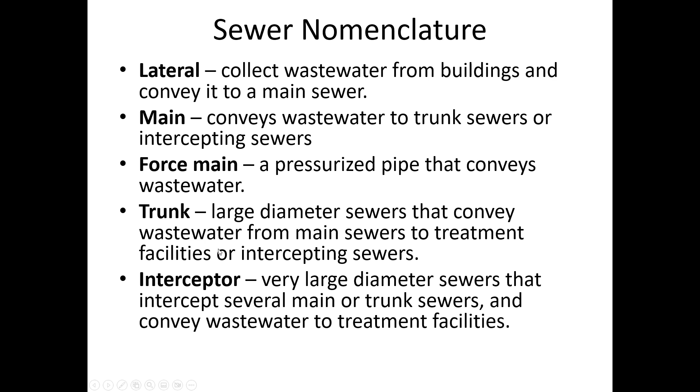A trunk is any pipe that has accepted several different mains together and is conveying it towards the treatment facility. There isn't much to distinguish a trunk line from an interceptor, other than in larger cities where you have lots of trunk lines coming together, then they usually designate an interceptor as something that's accepted 2 or more trunk lines. So it's a nested hierarchy: when 2 mains come together, the next one is called a trunk. When 2 trunks come together, the next one is called an interceptor.

Here's an illustration that shows the lateral is the pipe that conveys wastewater from a home to a main. And of course, if there are basements in an area, then the main needs to be buried lower than the lowest occupied floor in a building.

That's one consideration in design, how deep does the sewer have to be, is whether people typically have basements. Around here, I don't know, there are some basements in developments in Huntington, but most of the houses I've been in don't have much developed beneath the ground surface. I think that varies from place to place depending on the water table depth.

The connection to the main is usually not, from the side view, you maybe would be forgiven for thinking that it comes in at a 90-degree angle, but it's usually angled in a direction so that the laterals entering make the flow go in the same direction as the sewage flow, and having that helps to eliminate clogs and makes it easier for maintenance, because oftentimes mains are cleaned on a periodic basis where they've got trucks that will flush the sewer out to try and remove any kind of debris that's settled at the bottom of the pipe, or if they're doing inspections. Just for a variety of reasons, it's advantageous to have the lateral entering the main at an angle.

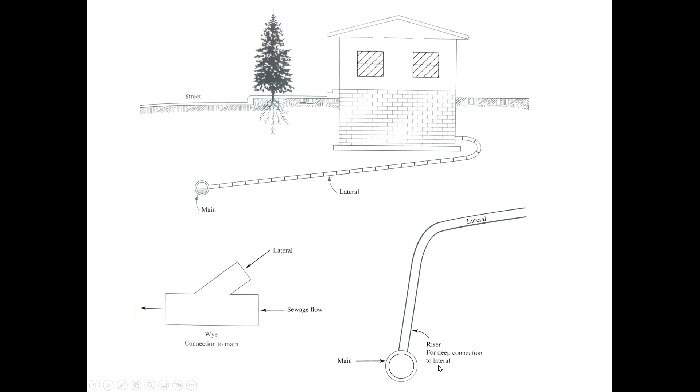For one thing, the slope of the pipe, where you have relatively shallow slopes there's more of a risk of sludge and solids settling to the bottom of the pipe, so maybe you need a more frequent spacing of manholes. But in locations with less flow variability and steeper slopes, then you maybe could get away with having the spacing increased a little bit between manholes. The purpose of the manhole is just to provide a location that the sewer can be inspected and accessed for cleaning.

So we call it a reach, the distance between 2 manholes. Here you can see the interceptor is designated as the largest downstream pipe that's accepting several different trunks together. This diagram is showing that there is a force main, and we don't know from the top view what would be the reason for the force main. It could be that it's draining sewage from a low-lying part of town, but this overview just kind of illustrates the fact that it would be common practice not to have the pipe diameters decreasing in the network.

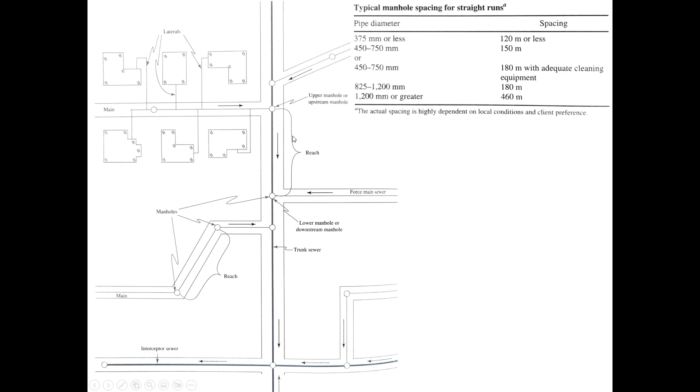We talked about in class on Wednesday that in the early 80s it became more common to have rubber gaskets where pipes come together, to reduce the effect of inflow and infiltration, but also to prevent the leakage of sewage into the groundwater. So there's a dual advantage there.

If there isn't fill under the haunch, that creates a lot of stress for the pipe and more risk of cracking. But if they do support the haunches, that increases the strength and limits infiltration and inflow concerns over the years, because little cracks turn into big cracks over time.

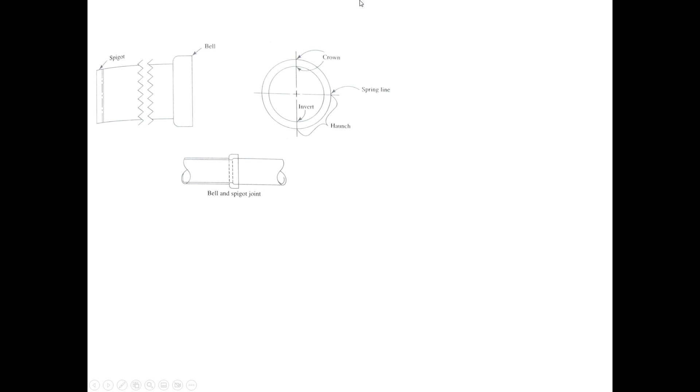It's typical to have manholes large enough for people to get down into, to remove debris or visually inspect. But cameras are getting much smaller, and fiber optic cameras and remote controlled inspection systems are making it less important for people to get down into the sewer, especially because it's so risky due to fumes that accumulate there—hydrogen sulfide in particular is really toxic and dangerous.

Because of the risk, it's always a pretty big operation lowering people into the sewer—someone has to remain at the surface to keep an eye on the worker, to make sure they haven't been overcome by fumes, and to rescue them if they get into trouble. So it's still common practice to have person-sized manholes for installed sewers, but it's less important than it used to be because of remote inspection technology.

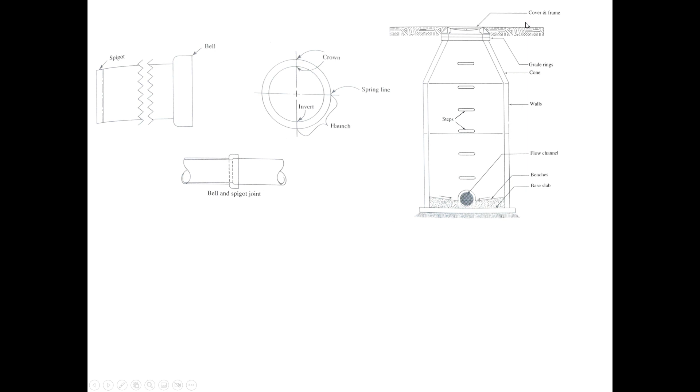Above the wastewater is just air. But as water enters the inlet chamber, the inverted section is a pipe that flows completely full. They may have a drop, like an induction section, where the pipe loses some elevation to try to cause all the sewage to fill the pipe. The key to the inverted siphon is that the outlet chamber and the downstream end of the pipe are at a slightly lower elevation.

You've probably seen siphons before—think of submerging a garden hose in a swimming pool, getting all the air bubbles out, then kinking one end while leaving the other in the pool. You could take the kinked end down a hill and unkink it, and water would start to flow through the hose. That's a siphon. It doesn't matter where the middle of the hose is, as long as the outlet end is lower than the inlet end, water will flow through.

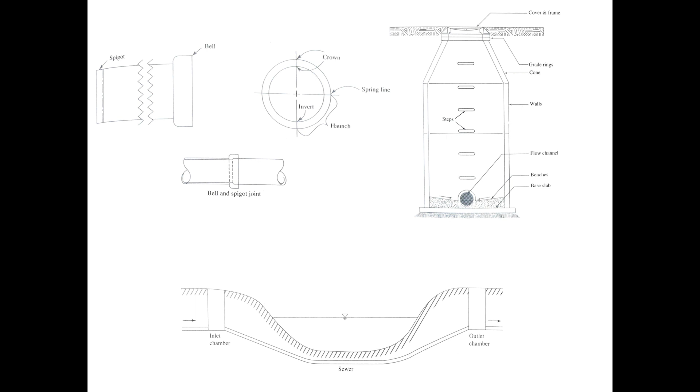And so if a pipe is flowing full, then it's relatively easy for us to calculate the cross-sectional area and the perimeter of the pipe. And especially in wastewater, it's almost exclusively just going to be a circular shape for a pipe. So pi d squared divided by 4 is the cross-sectional area of a circle, and pi d is the wetted perimeter of a circle where this pipe is flowing full.

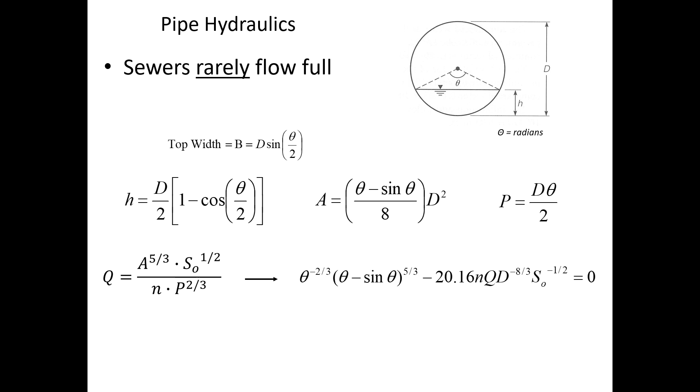This is kind of what we use when we use programs like StormCAD or SewerCAD, software packages that we can use to analyze the hydraulic performance of a pipe network. They're using equations like this in order to predict what the flow is.

So the other complicating factor is that in this Manning's equation, there's a different n value that we have to use compared to if the n value was for a pipe that's flowing full. So this n value, for assuming full hydraulic capacity, is different from the n value when the pipe isn't flowing full. There's a table that's both in the FE reference manual, our textbook has a copy, the hydraulics book has a different copy, and they all look pretty much the same. It's a nomograph that illustrates how, for different depths, Manning's n value changes.

Or I guess what we could say, this is the effect of that thing I drew on the board - the fact that when you've got relatively less wetted perimeter, the effect of the roughness is reduced. So this is how we account for the effect of the n value compared to when it's full. You'll notice here, this is saying the n value relative to the n value of when it's full. And so we'd read that across the top, and then across the vertical axis here is the ratio of the water depth to the pipe diameter.

So there's a couple of different ways to use this nomograph. You could calculate the full capacity of a pipe and then use this curve to find out the partially full capacity relative to the full capacity. Or you could find the updated n value and apply that updated n value in this equation.

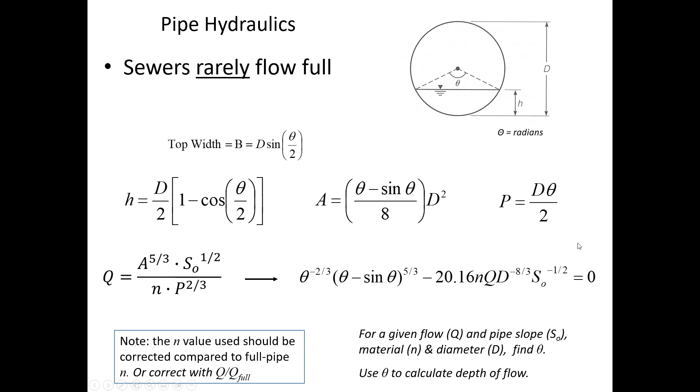So what I wanted us to have some time to take a look at is how to analyze a pipe when we have flow conditions that aren't full.

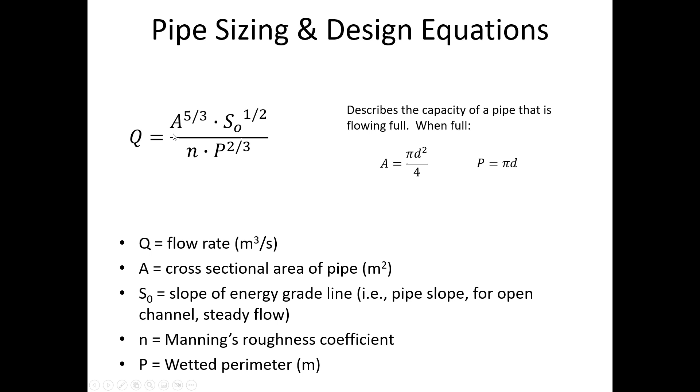And by the way, what I showed you here, this version of Manning's equation is for SI units. If we're working in traditional units, meaning feet for the length rather than meters, then we have to add 1.49 to the front of that. So in this example we're going to look at, this is traditional units, and so the Manning's equation we're going to use has 1.49 as a units conversion coefficient built in.

Okay, so we're going to just step through this together, both using the nomograph method, and then I'm going to show you what the angle method would be like if we wanted to calculate it directly without having to find the full flow rate first.

Okay, so this is a 24-inch diameter concrete pipe, which is flowing on a 0.5% slope, and the depth of flow is 9 inches. Now, we want to know what is the flow rate when the water is at 9 inches depth. How much water is in that pipe to cause it to flow at a depth of 9 inches out of 24.

So, first of all, just using the nomograph method, we have to find out the full pipe capacity. I guess what I'll do with the recording is I'm going to do some of these calculations on the whiteboard, but then I'll bring it up on the screen in a bit to make sure it's brought into the recording. Okay, so the diameter here is 2 feet.

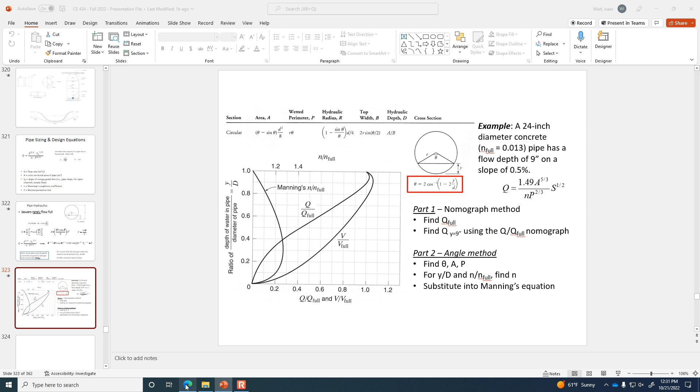So while I go get a different marker, I'd like you to calculate what is the capacity of the pipe if it's flowing full. So hopefully what you found is that the full capacity would be 16.04 cubic feet per second.

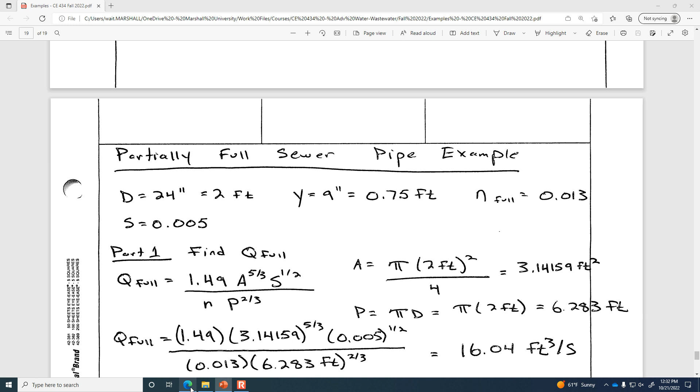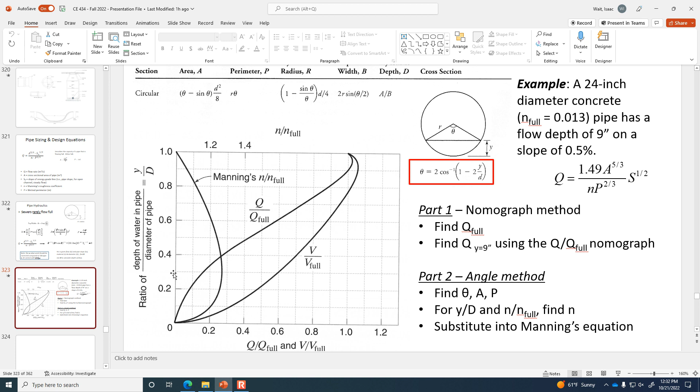Now what we need to do is go to the nomograph and try to find out where we intercept this curve. Our ratio of Y to D is 9 inches out of 24 inches, which is 0.375. So on this curve, we need to find, here's 0.2, 0.3, so we want 0.375, 3/4 of the way between 0.3 and 0.4.

So over here, then we go to the point of intersection, and then up. So it looks like it's most of the way towards 1.3, because here's the line for 1.3. Here's 1.2. So what I estimated, oh I'm sorry, we're doing the Q, not the N value. Wrong curve. All right, so we're going over here from 0.375 to the point intercepting the curve of Q to Q full. So that is here and then down.

Okay, so Q to Q full is, I said 0.24. So if we had this printed out, you had a ruler and all that, 0.375, intersect, and down, 0.24. Let's just go with it. Q to Q full is 0.24.

And so therefore, the flow rate when it is 9 inches of depth is going to be the flow rate of 16.04 cubic feet per second, multiplied by this ratio of 0.24, and that is 3.85 CFS, cubic feet per second.

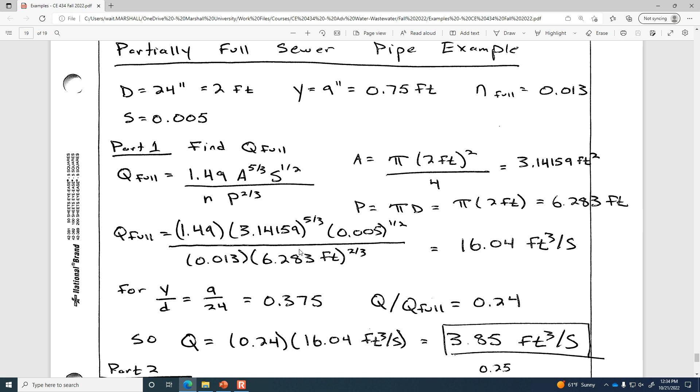All right, now the other approach is to try and calculate the angle, the area using this formula, the wetted perimeter using this formula, and then finding the ratio of n to n full, and then substituting all of that into Manning's equation. So let's start by finding the angle. I'm going to erase what's on the whiteboard now just to make some extra space.

Okay, so theta is 2 cosine to the -1 power of 1 minus 2 times y to d. So the y is 9 inches and the d is 24 inches. That's the same as some calculators have it listed as ACOS, the inverse cosine. So on the inside there is 1 minus 2 times 9 divided by 24. That is 2 times ACOS of 0.25.

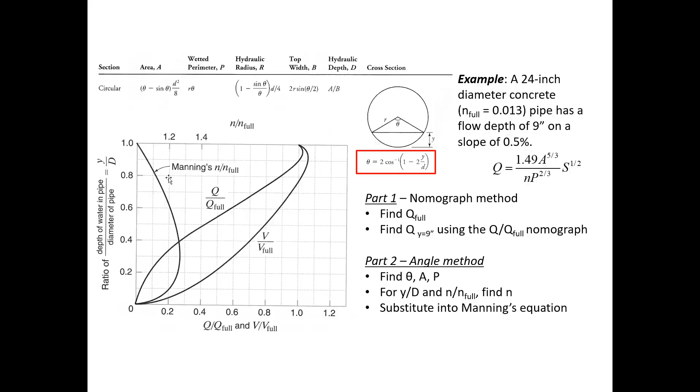Okay, so let me show you how we could substitute all this into Manning's equation. We know the area, we know the wetted perimeter, we have a new updated N value. So this is showing how we calculated the angle. We used the angle to determine the area, the wetted perimeter, updated N value, and substituted that into Manning's equation. And we get that the flow rate is 3.78 CFS.

Compared to the way we did it before, that's less than 2% different. And that's to be expected since we're just kind of eyeballing values off of this nomograph. We were eyeballing the ratio of N to N full, and in the earlier problem, we were eyeballing the ratio of Q to Q full. So I feel pretty good about the fact that these two methods agree as closely as they do, given the curve that we used.

So partly full pipe hydraulics is a complicating factor that most design software handles in the background, and you may not even be aware of it. But I think it's good that you know what the considerations are, especially because there could be questions related to this on the exam.

Or are we gonna make giant spreadsheets again? Giant spreadsheets? I don't know, probably not. I think that the homework problem you'll have related to pipe hydraulics for this class will probably be pretty mild.